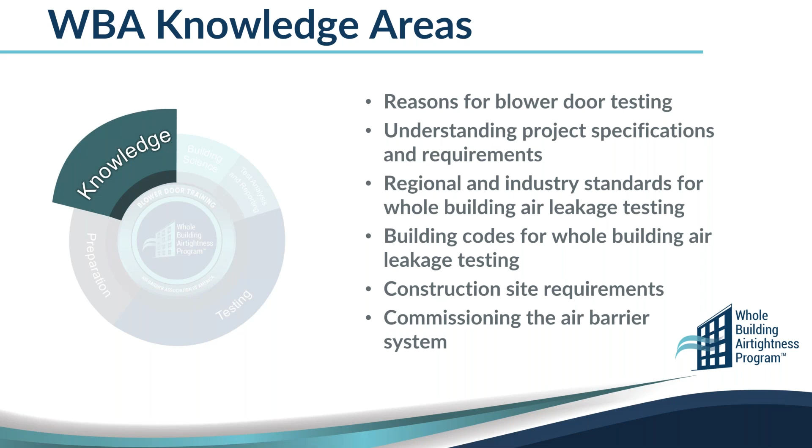We're going to get into project specifications and requirements. So what are we seeing in regards to project specifications? Regional and industry standards. So that's where we take a look at all those different test methods from various countries and all over the board in regards to maybe what the code requires and some new ones coming out. We'll get into some of the commissioning side of things and some of the construction site requirements. So this becomes more of a knowledge base of just understanding what's out there in regards to preparing you to even understand why would I do a whole building airtightness test in the first place.

Now, you can't do whole building airtightness test without building science. So of course, there's going to be a module about building science in there. We'll get into the types of blower door testing and preparation. Really, preparation is a large part of coming up with a plan, making sure that we're preparing to fully execute the test. And then obviously at the end, we're going to actually conduct the test.

So we're going to start from that knowledge base of here's what I need to know across the board. And now we're getting into understanding equipment, understanding plans and preparation, how to determine envelope area and those test boundaries and so forth. So over that period of 5 days, we're going and touching all these things as we go through the program. And at the end, we have to understand how to determine the results and then obviously write a report in accordance with whatever test standard that we used.

So the way that we structured over these 5 days is we kind of have 2 days that's that conceptual learning. So that's going through the building science, the standards, the different test methods, the reasons why we're going to do it. We'll get into some of the equipment and some of those things. So we're kind of getting into basics.

After that, we're now transitioning into 2 days of hands-on training. And this is obviously what the students like the most. We've got that classroom. Now we're transitioning more over to a workshop. So here's just some pictures of the workshop at the South Seattle Community College.

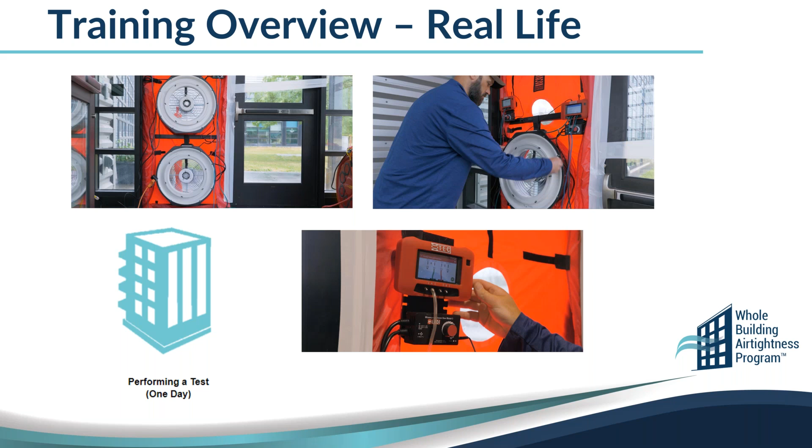So as part of the training, we've gone and developed a training manual. And so we've spent a tremendous amount of time putting together a very well articulated and well put together training manual to support the training program that you would attend.

So this gives you a little bit of the flow in regards to the modules and how the student experience would be. We go through about 11 modules. Module 2 and 3 get into air leakage overview, why we're doing testing, and the equipment. Then we get into more details, like what test approach we're going to take, what are compliance factors, planning the test, preparing the test, which is a big part of it. It takes more effort and time to do the planning and preparing than actually performing the test. So this gives you a flavor of the flow you're going to go through.

This manual is great for students to follow along, but even more importantly, to have a good resource after the training. It's 5 days of intense training, we're not going to remember everything, but we'll have the ability to go back and review that training manual.

So it ends up being 2 volumes. Volume 1 is about 318 pages, so you can understand it's a very substantial manual. Within there, we have different things to help students: activities, concept checking questions, self-study things. This is meant to provide the information for people to work together on activities, and then make sure they're checking what they've learned and have a good understanding of it.

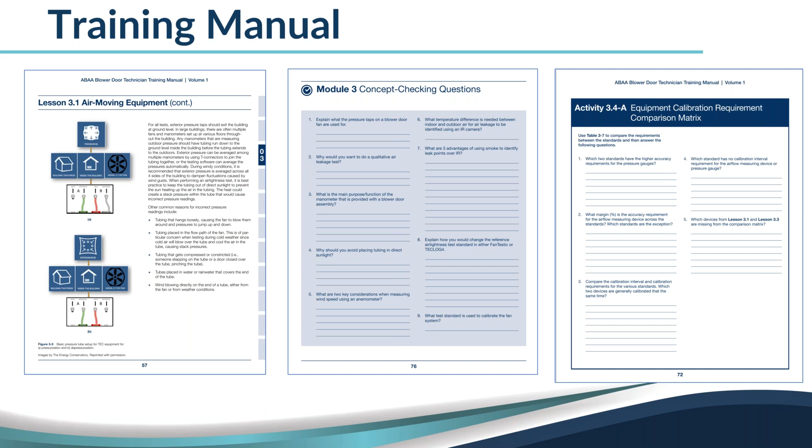Super proud of this training manual that's been put together. Nothing but great feedback on the quality of it and the way it's laid out. Now if we go into volume 2, close to 90 pages, it gets into some very specific case studies based on larger buildings, different types of facades, different types of stories, some different complexities.

This goes through how we actually did testing on these buildings. You can see we get into coming up with testing plans based on different types of equipment, reviewing all different types, not just one manufacturer, but all manufacturers. So here's just an example.

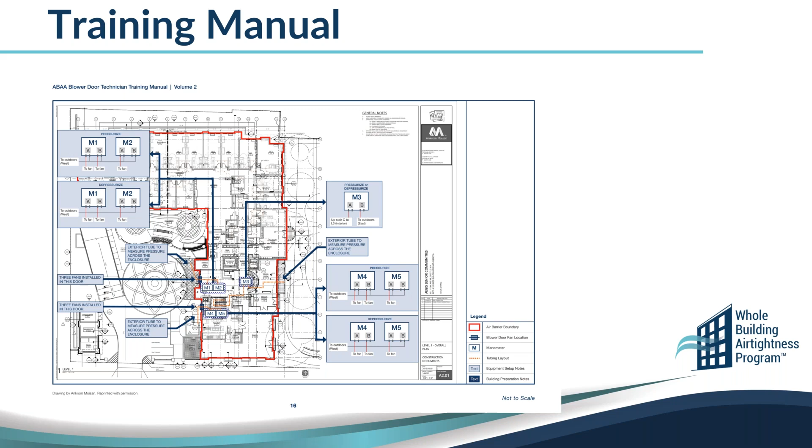We have a set of architectural drawings. We're determining the airtightness boundary - where are we going to put our tubes, where are we going to do this, where are we going to do that. This helps bring that knowledge we've developed and really starts to bring it home as we work through some of these real life case studies.

Over 3 classes, we've had some good feedback from our students. As we've gone through it, we've made improvements over the last year and a half to take that student feedback and make sure we're meeting their needs. All the students we've assessed after going through it are very, very positive about how it's helped them. We've had people newer to the industry, or who have only worked in single family homes, just putting their feet in the water with large buildings.

And we've had a number of very experienced individuals go through the training too. So it isn't necessarily just for new entrants - even people who have been doing testing for a number of years, we're reinforcing what they know, but also bringing them up to speed with new training programs and new test standards that are out there.

With all the test standards out there, we've really focused a lot on the most current ones. ASTM E3158, now in the codes, is - and this is just Ryan speaking - the most complete testing standard for whole building airtightness testing. It's gone through about 12 years of development, starting as a test protocol with the U.S. Army Corps of Engineers, then the association worked on it for about 2 years, meeting every Monday for a number of hours, got it to a good point, and then proposed it to ASTM.

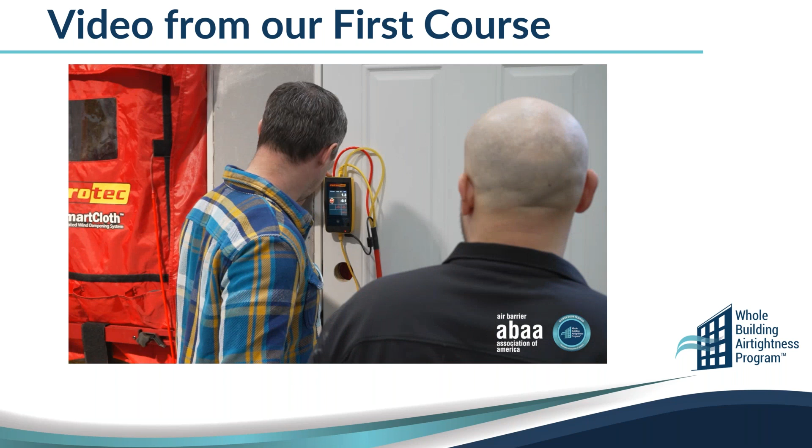What is the equipment you need? What are the steps that you need to prepare the building? And it really focuses on the actual test. So it runs you from the day you start thinking about doing the test until you write your final report and turn it in.

All right, so hopefully that provided a little bit of the flavor of the course and kind of what the expectations are. We had some really nice interviews from local individuals in the state of Washington and how it's going to help them. So now let's transition on to the certification side of things.

So this is the program that's just recently been launched: how do I get certified in regards to being recognized for my knowledge, skills, and abilities.

So the objective of us putting this together was really to create a standard, to create a level playing field, to create something that could be relied on in regards to identifying individuals that have the knowledge, skills, and abilities to do the testing on large buildings.

So to start to build that infrastructure, to start to meet some of those industry demands as we start to see more and more jurisdictions require it, more and more building owners require it, specifications coming out, contract documents coming out that say they want to do this. So we're really just probably at the start of growing that industry.

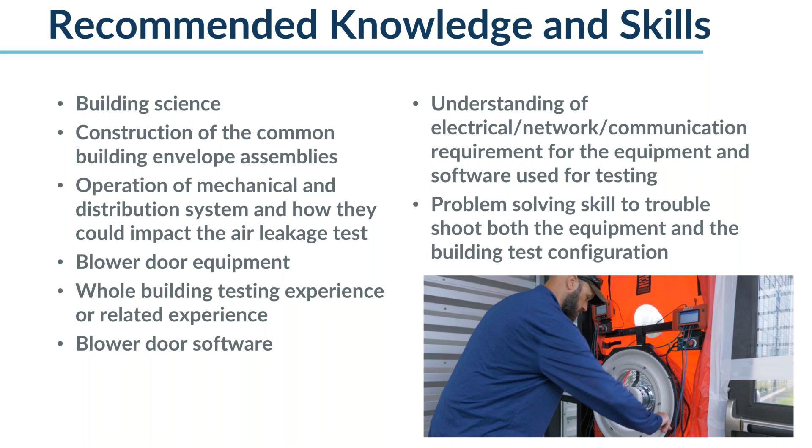So the certification is built, and we're going to take a look at 2 levels. We'll kind of have a level 1 and a level 2, but people coming in do have to have some knowledge and skills to be able to be comfortable. And obviously we want to set you up for success. So making sure that you understand what you should know and be comfortable with before applying for certification. Here's 2 levels, and we've kind of broken it up into foundational level 1, or expert level 2. You can use different terms, but in essence we're just putting 2 levels. And for each of those 2 levels, we have different requirements.

The other thing we tried to do here, a couple things. One, we want to provide a career path for someone that's maybe getting into it. And secondly, we want to recognize those individuals that have really been doing it for quite some time, have invested in training, have proven their skills through practical or written tests. So it provides a bit of a career path for level 1 to aspire to that level 2. And then as people are maybe more experienced, they can apply directly to level 2.

So let's go and break down what these levels mean and get into some of the details. For this level 1, there's 2 tracks, and really what you're going to notice the theme here is, did you take the ABAA training or did you not take the ABAA training?

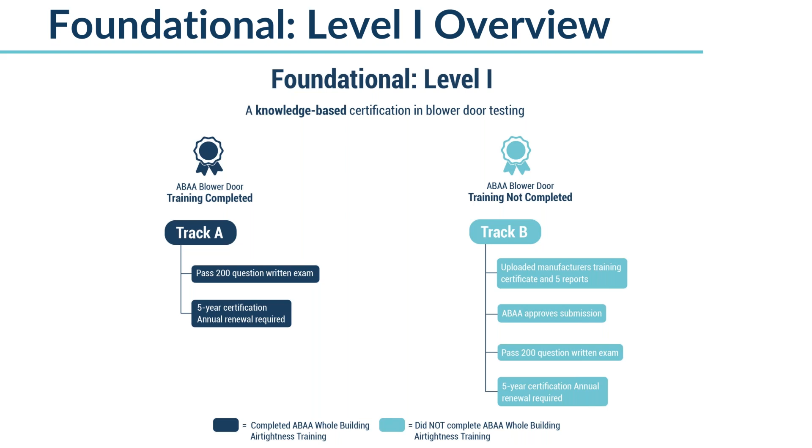As I mentioned before, in the training, ABAA training is not required, but there is some training in regards to that. So if we take a look at track A, we're going to take some training, we're going to do a written exam. Track B in the situation is we're not taking ABAA training, but we do have some maybe training we've taken from the manufacturer, and we can provide some examples of test reports that we've done. So we kind of have that separate path there.

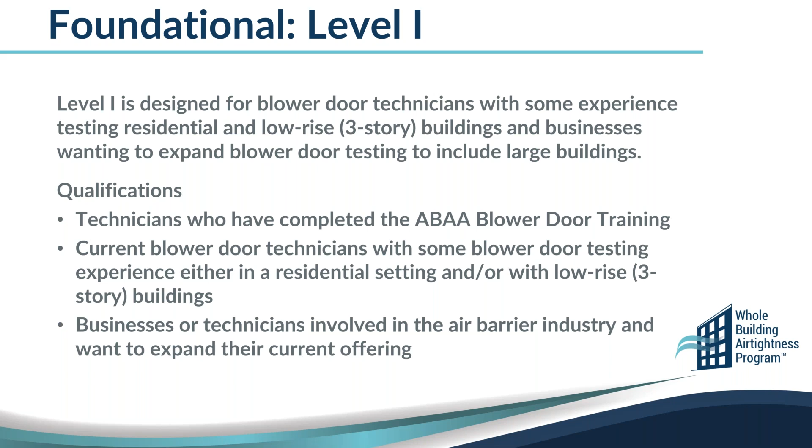So we've designed it for blower door technicians that have some experience. Maybe they've been doing mostly residential low rise, maybe they just started doing some large building testing, or maybe part of a team and did one part of the test, whether it's building prep or the report writing, whatever the case may be. So here's the 2 ways to get it: either those that have come in and done the ABAA blower door training, or those that have done some training with the manufacturers already and then have some experience in regards to actually doing some of the testing.

So let's break this out. These are fairly straightforward, a little bit more to do with level 2 with the experts, but level 1 is fairly straightforward. Track A here, basically going to the ABAA training course, and we're doing an online proctored exam of 200 questions, and it has an 80% passing rate. So it's really step 1, step 2, and you're certified. Now there's some paperwork you'll fill out, there'll be a licensing agreement to use the registered trademark of ABAA and so forth, but really that is a very simplified process to get certified.

Now say you have taken manufacturer training or would prefer to do that. So here's another path you have. You can take that certificate from the training from the blower door, and you're going to show us 5 large blower door tests, and it can be based on a number of standards. As I said before, 3158 is, in my opinion, the best test method out there, but it can really be other test methods that are referenced in code too.

And so you have that opportunity just to submit that. Now you're going to write the same exam, still that 200 question written exam. You're going to pass with an 80%. So really, if we break this down, it's you either took ABAA training or you didn't. And if you didn't, here's the things that you need to do. So that kind of gives you a summary of level 1.

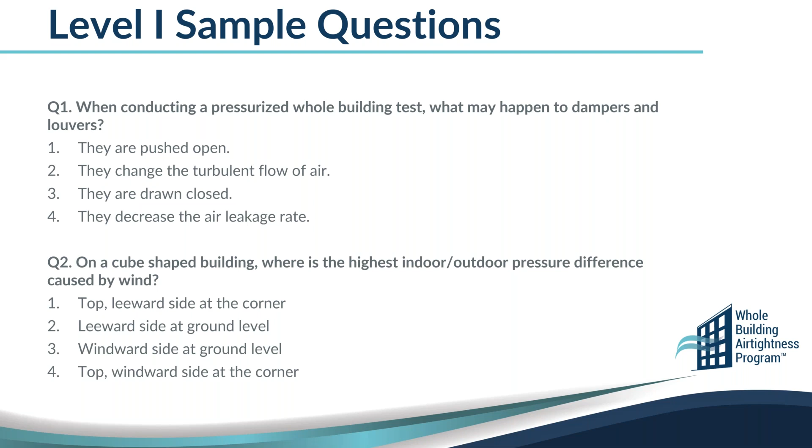Well, level 1 is primarily going to be a multiple choice exam, so we're trying to take out any type of subjectivity. It's going to be a question with 4 potential answers. One of them will be correct, the 3 will not be correct, but they also won't be trick questions. They will be questions that if you have your knowledge, you should be able to identify the right one. We'll have what we call 3 distractors, which are not so out of this world that you know it's not that one. So this is kind of what you would expect to see, a multiple choice question with 4 possible answers and you pick the correct one.

So why did we design this? Well, people that have experience already, they've been doing it, and now they want to be recognized for it. Someone is very well qualified, they know how to do everything, and this is now a way that they can be recognized. There really hasn't been a certification program in the US market that has really done this for whole building airtightness testing on large buildings. Again, it's been around for a while for single family homes, but it is quite a big difference doing a 1-story 2,000 square foot home versus a 260,000 square foot school. So a big difference in regards to going from smaller buildings to larger buildings.

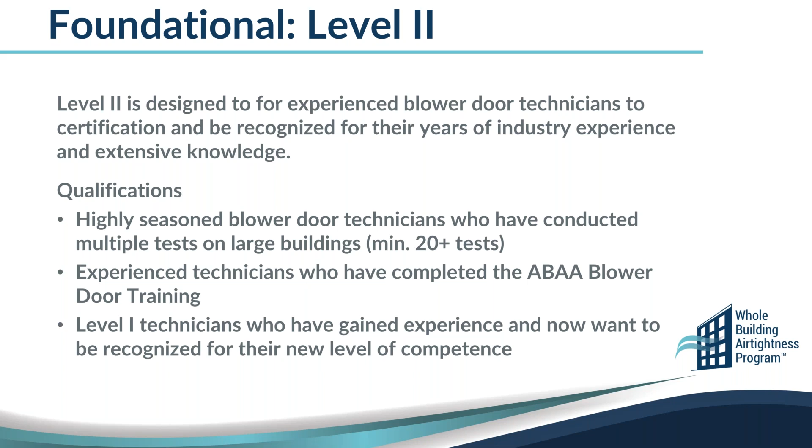So let's look at the level 2 track A requirements. Track A and track B are basically saying you have gone to the ABAA training course.

So we're going to go to the course, and you're going to write an exam. If you are level 1 already, you're going to write a 50 question exam. If you're going directly to level 2, you're going to write a 250 question exam. What makes up that 250? Well, it's really the level 1 plus a level 2, right? So it's basically 2 different exams that you're going to write at the same time, or honestly, you could even do them separately. So let's say you're level 1 already, then you would come in and write a 50 question exam. If you're going directly to level 2, then you'd be writing a 250 question exam.

Same type of thing, we have that 80% passing rate. Now here's where some of the differences are going to come in. So we've taken some training, we've proven our knowledge through the written exam. Now we have to prove our competence, and there's 2 ways that we're going to do it.

Option 1 is doing a practical exam. So this would be where we come, we have someone, let's say I'm the proctor, and I watch you do everything from A to Z in regards to doing a whole building airtightness test, and we would mark you on it, just like you would get marked on a written exam.

So maybe you haven't been doing it as long, or maybe you don't have the requirements for the other track that you have to submit a number of test reports. Well, now we've provided an option for you, right? So a lot of this is going, let's provide as many options as we can to individuals so we give more opportunities for people to become certified. So take training, you're going to do a written exam, and then you would do a practical exam. I'll talk a little bit more about what is the practical exam and how it's conducted.

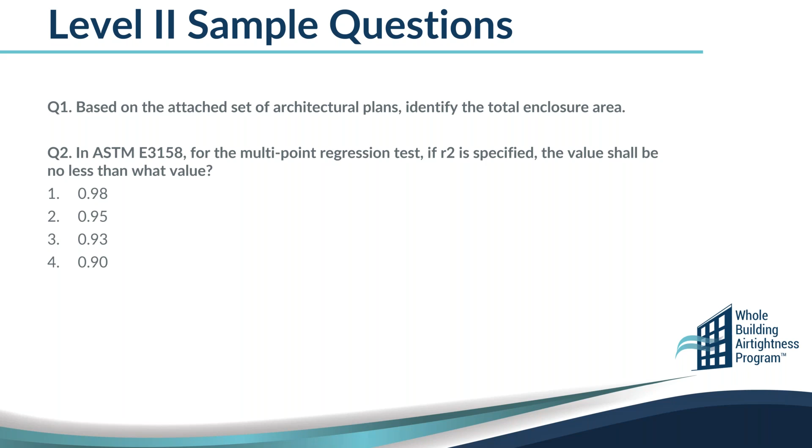Based on a set of architectural plans, identify the total enclosure area. So now we have a set of plans in front of us - what's the total enclosure area? It's not necessarily knowledge based; we actually need some skills to do that. These are just some of the sample level 2 questions.

Now I want to talk about the practical evaluation. As I touched on before, it's doing a test on an actual large building. In Washington state, we've primarily worked with South Seattle Community College to use one of their buildings for the practical examination. I would be the proctor - let's say I'm proctoring student number 1. I'll sit there and watch him, basically without saying anything, just observing him go through everything.

There's an actual form that gets filled out. Again, it's meant to not be subjective - simply yes, no, or not applicable. We walk someone through: determine this, come up with your test plan, set up the equipment, do the building preparation, perform the actual tests, and then write the report. Now we're visually seeing someone who knows how to do it, proven through this practical evaluation.

A bit more detail: it's a 6-hour time limit, and it takes place in an ABAA approved and tested building. Prior to this, we're looking at setting up a number of buildings close to the training areas that have been vetted and tested, so we know it will be fair and applicable to all - one isn't crazy complex and another too simple. We're trying to create a standard for what type of building is used.

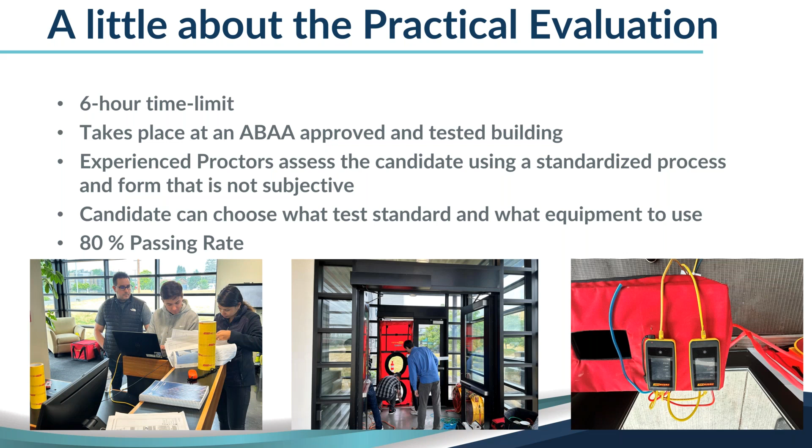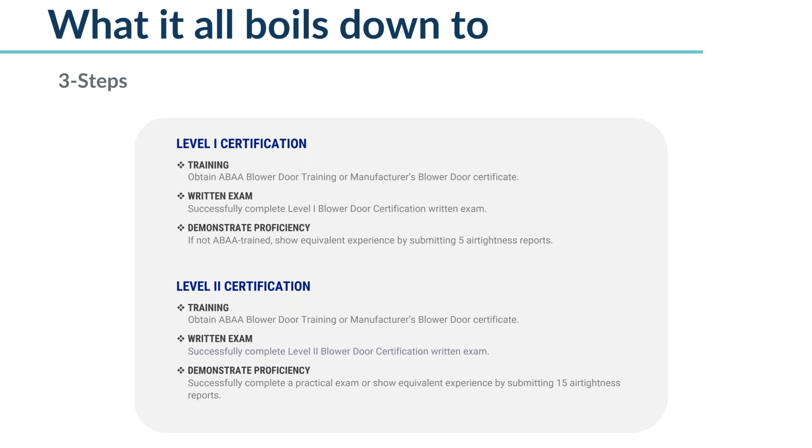As I mentioned before, what does this really boil down to? I like this approach of just 3 steps. Let's take a look at level 2: we're doing training, a written exam, and demonstrating our proficiency. It's just at the training part or the demonstrate proficiency part that we have options, but it still boils down to training, written exam, demonstrate proficiency. This is my 3-step approach to make all those other tracks and things make sense when we want to boil it down to what do I need to do to actually get certified.

So where are all the details? We have what we call a candidate handbook. The candidate handbook is meant to provide everything you need to know about becoming certified - what we'll be testing you on, how to maintain your certification, how to get recertified, information about the practical evaluation, and even samples of what a test report could be. This is meant to be one document that walks you through everything you need to know about what you need to do to become certified, and what knowledge or skills you should have to be successful in getting certification.

So this is really the one document that you'd want to review right off the bat that gets into more details and more specifics in regards to the certification process, versus kind of the quick overview that I've done to kind of explain the path and the different levels we have.